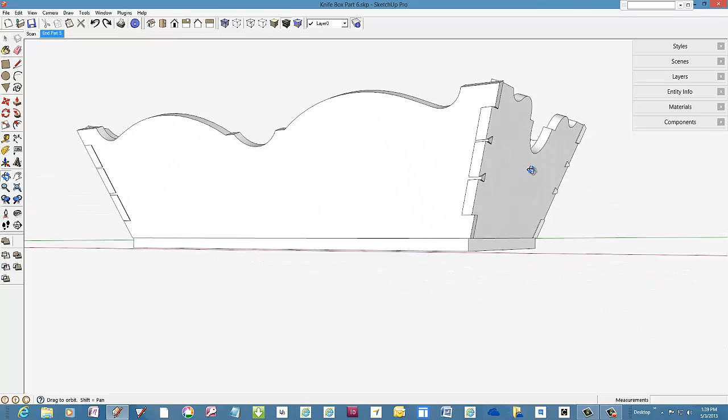We're getting close to the end of the series. One more to do after this one, covering the base molding. In this penultimate part, we will add the handle to the existing assembly of the knife box.

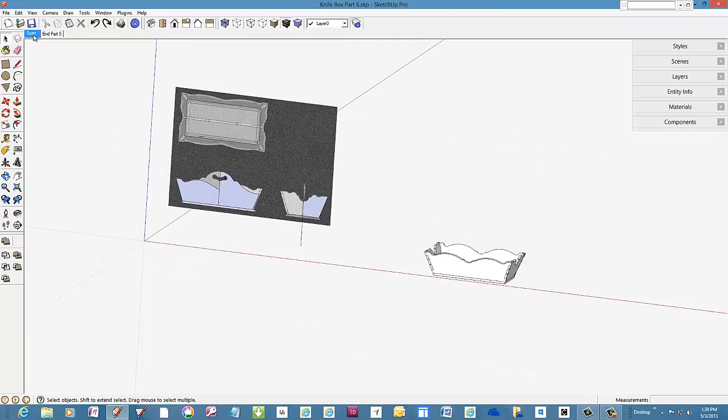The handle is held in place by protruding into stopped dados in the end components. The first step is to get the handle shape as created in part 1 of the series. The shape exists on the scan that we used in that first video. I'll make a copy of the shape and move it over to the knife box assembly.

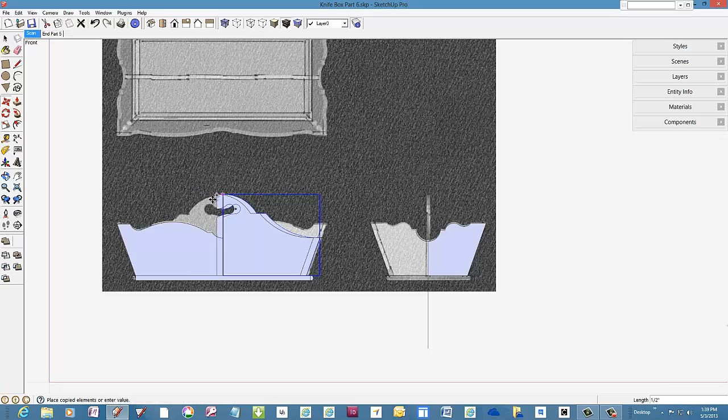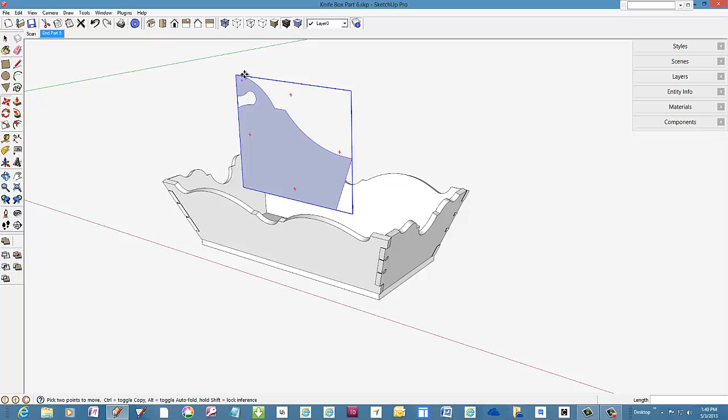The shape is currently a group, so I will explode this group and turn it into a component. Right click on the shape, right click on the shape and pick explode, and then right click again and pick make component. I'll call it handle.

To precisely position this within the box, I will need to move it along each of the red, green, and blue axes. First, the red axis. Click on the center line. Tap the right arrow key to hold the movement along the red axis. Then touch the cursor along the edge of the bottom until the midpoint appears. You should see a cyan color at that point.

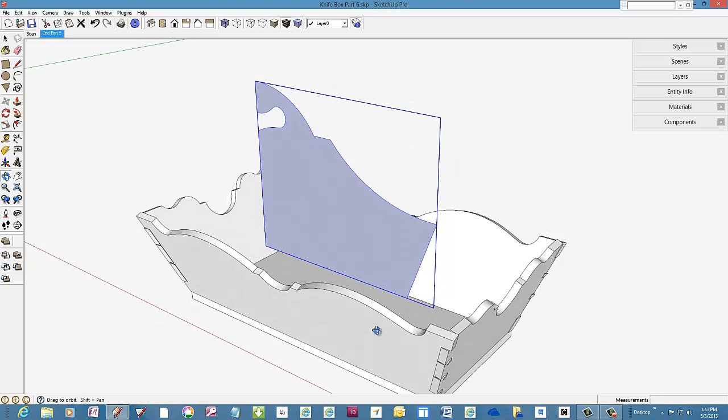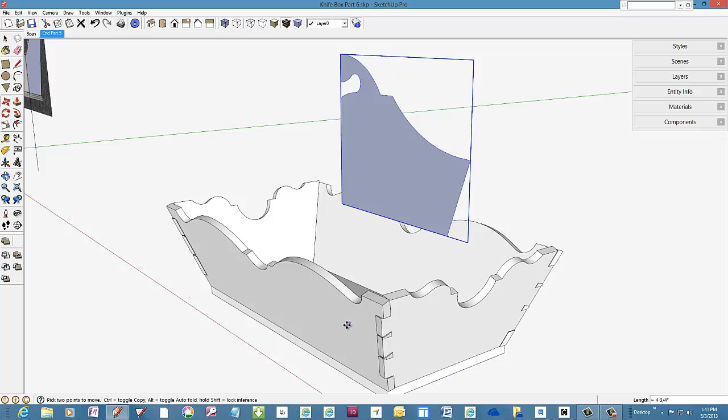Now let's move it along the green axis. Tap the left arrow key to force the movement, and again find the midpoint of the base edge. Then click. One more move, and that's on the blue axis. Force it with an up arrow, and then touch the cursor on the face of the bottom. The handle will be flush with the top face of the bottom.

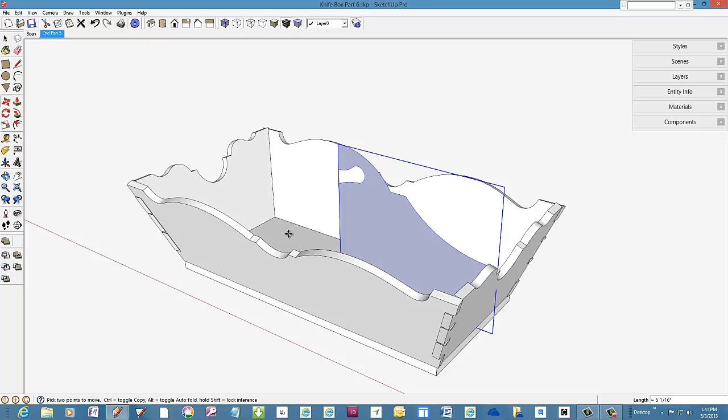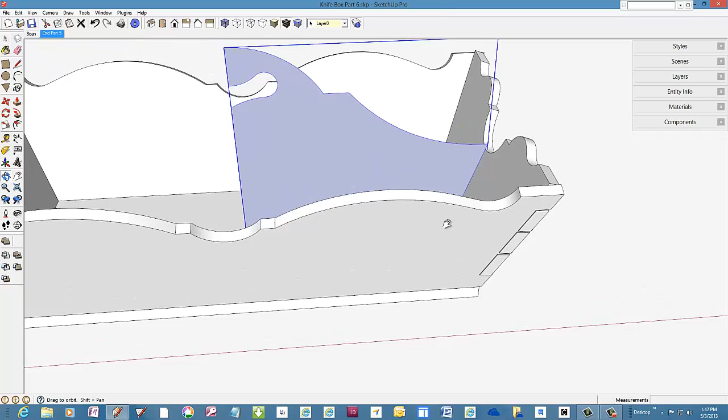We can do a little inspection to see that the positioning is accurate. Also, I've provided some extra height of the handles. You can see it protruding above the shape of the end piece there. That gives me some extra room to use to do some final shaping in the shop and fitting.

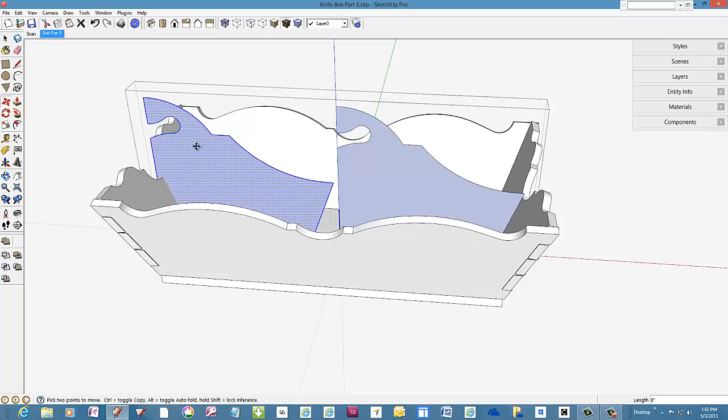This is only half the shape, so we need to copy that shape, edit the component, double click to get the shape, copy that shape, and move it down the red axis. Then do a flip along the red axis. And then zoom in close to make sure you pick the very end of the shape and move it into the center line for connection.

There'll be a joint that shows here, a line through the middle center line there. I'll delete it with the eraser tool.

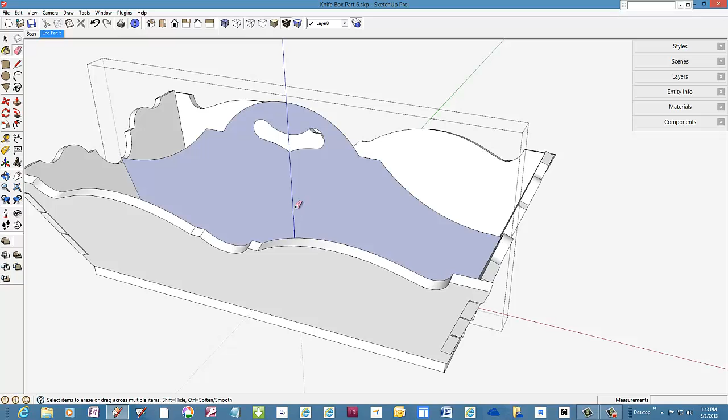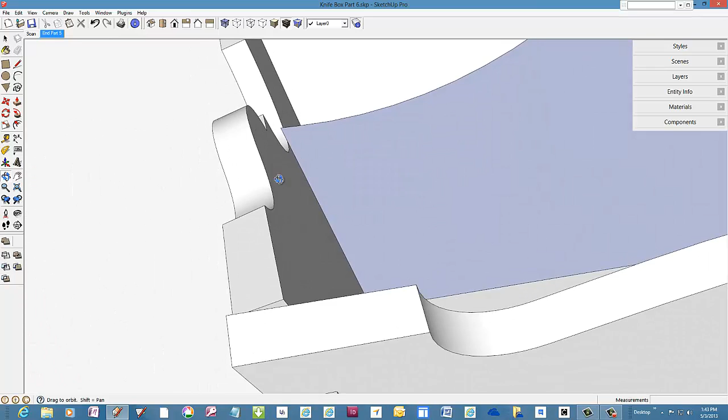Now is a good time also to just check to make sure that we've got this thing positioned correctly and it's the proper length, so we can zoom in and check this end over here to make sure it also fits properly against the end piece. And you can see that protrusion again to give me some extra play in the shop for shaping that end piece.

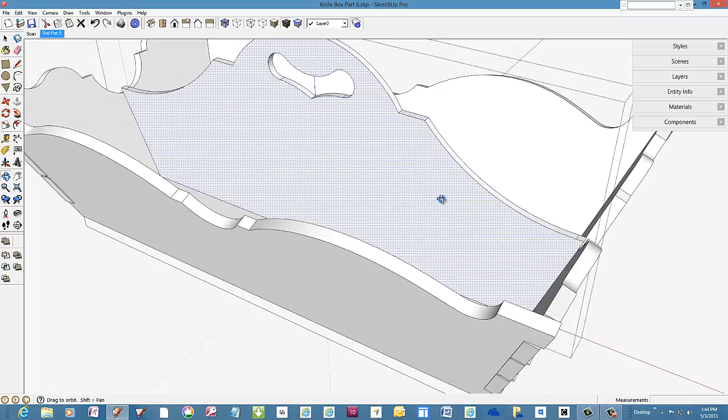To give the shape a thickness of 3/8 inch, we can push-pull 3/16 on each face.

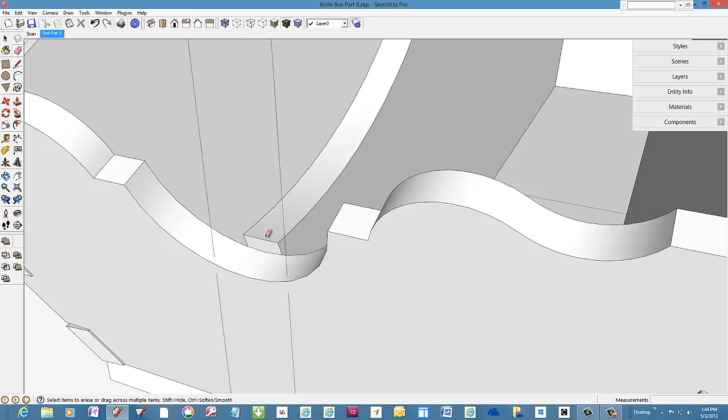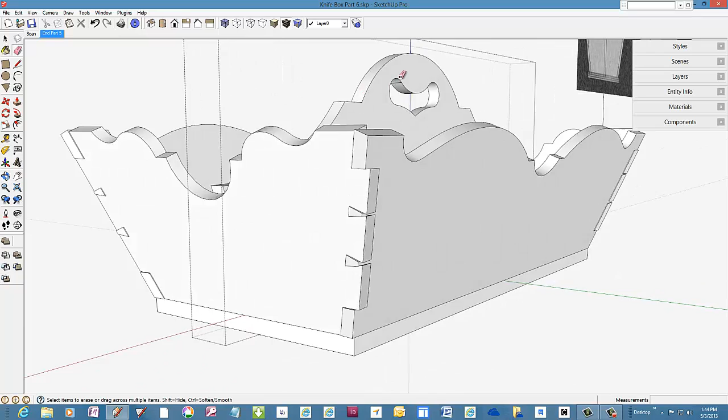Now I can see some extra edges that need softening. Use the eraser along with the Control key or the Option key on the Mac. Click on these extra edges. There are a few of them here. I can see a couple more inside this little recess opening, finger opening, and then there's another line over here. I suspect, yeah, there's an extra line up in the top of that cutout.

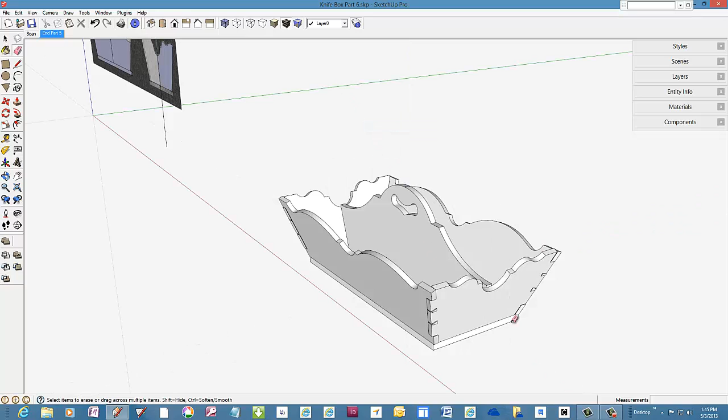Okay, so the next stage is to extend the length of the handle on each end 1/8 inch that sets into the dados that will be put into the end pieces.

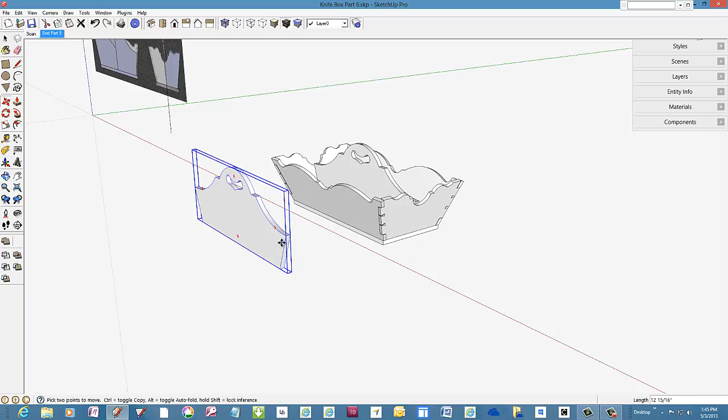To do that, I'm going to bring a copy out in front of the handle. And edit the component. And I'm going to use the tape measure to put a guideline down 1/2 inch from the top edge here.

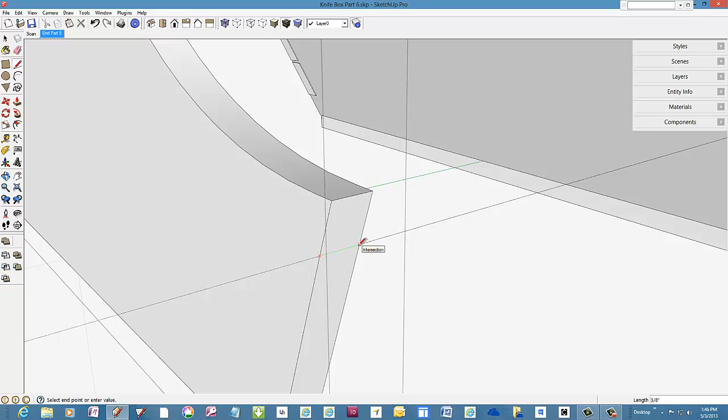This is going to be a notch in the protrusion. So watch for the blue color on that cursor to make sure that that guideline stays on the face, on that angled face. And then draw a line across that edge there. Delete the guideline.

And we need to create this 1/8 inch protrusion. I'll draw a little 1/8 inch line there on the red axis. I can come up and I can see a magenta color, which means I'm parallel, and I could do that line there, but that won't actually work as well.

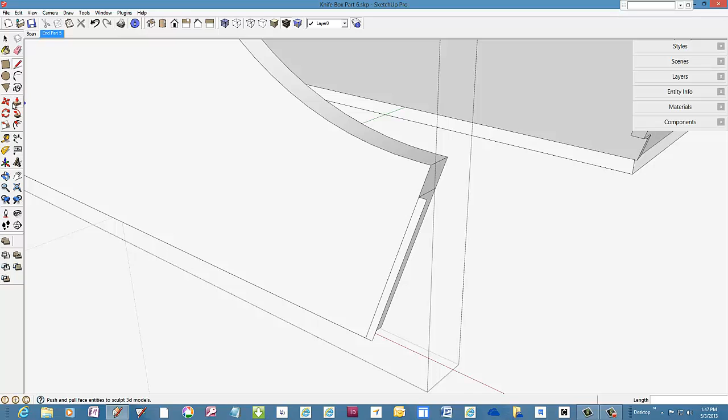I'm better off just pulling a little line out here on the red axis, 1/8 of an inch, and then coming down parallel end point to end point, creating that little face, and using the push-pull tool then to complete the protrusion.

We've got an extra edge here, a line that needs to be deleted, and one over here on this face, on the back face. And we've got a protrusion that'll go into a stop dado.

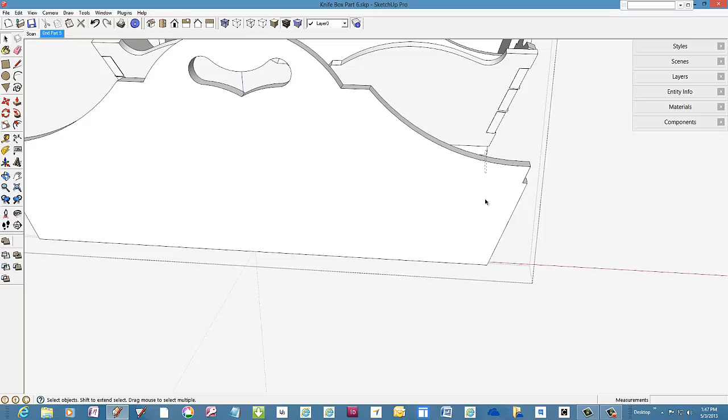I'll copy this shape to the other end. I want to select the full end there. I'm going to do that again to make sure I got it all. And pick the Move Copy tool and bring a copy of that shape over on the red axis. Flip on the red axis.

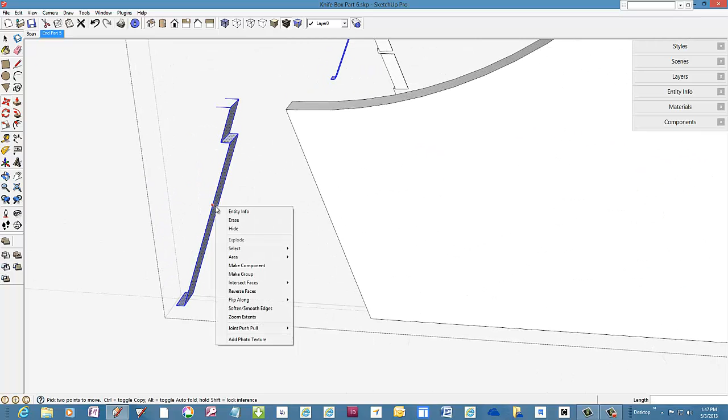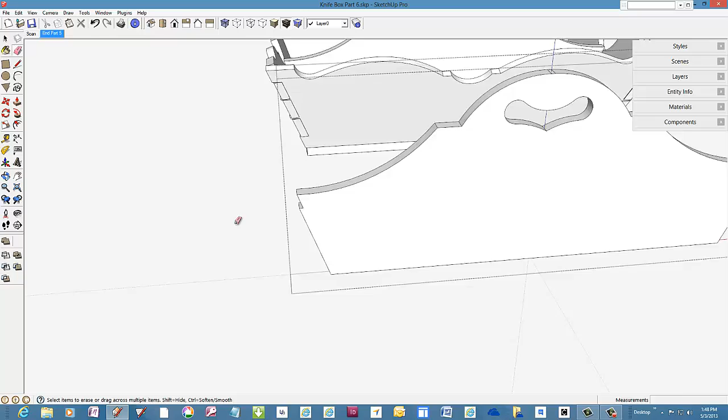And connect in here. There'll be a couple faces missing that we can just finish up with a little edge, tracing over and then getting rid of the extra line again on the back as well. There's a face missing. Just trace over that edge, then delete the extra line.

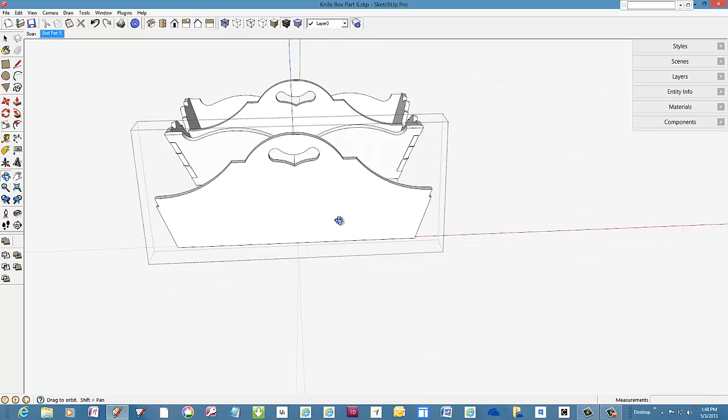So we're done with this copy now, and we can close and erase. Come back to the assembly, and we need to make that dado in the end component.

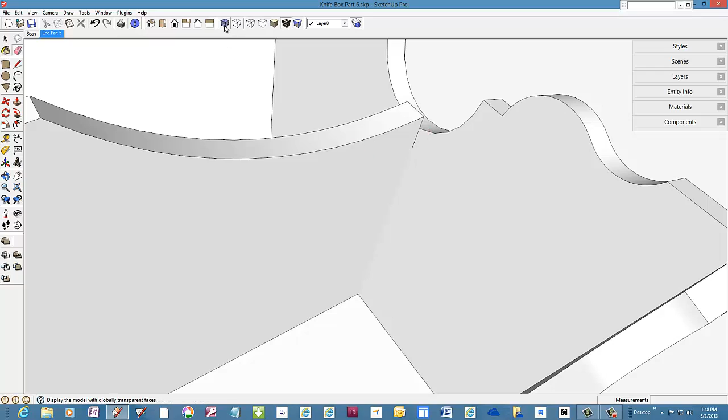I'm going to turn on X-ray so we can see the protrusion, and then just use the line tool to trace over that protrusion. First edit the component, edit the end component, and draw in the shape of that protrusion.

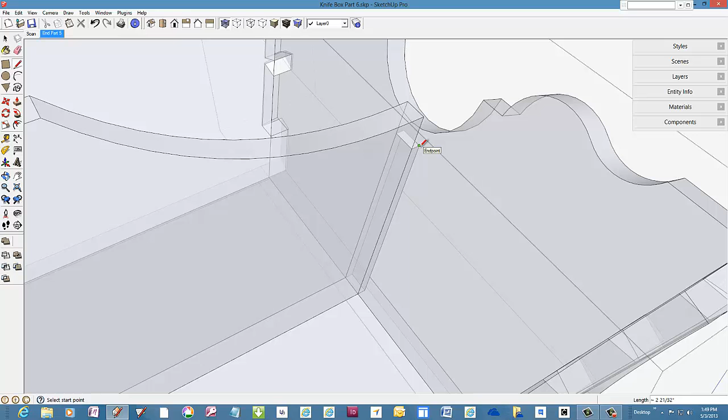And trace over all these little edges here and down the back of the bottom of the dado, and we can turn off the X-ray to see what we've got.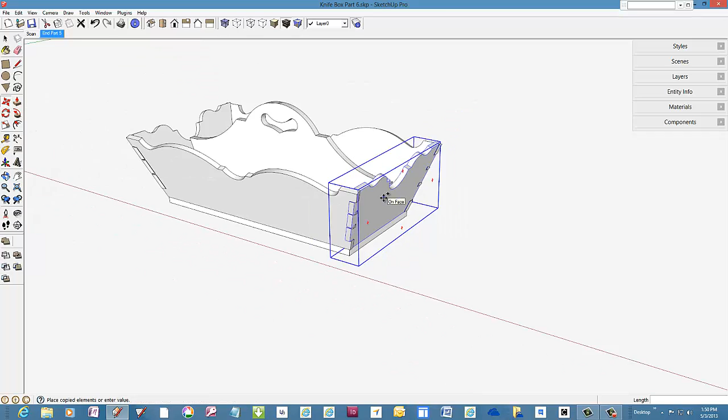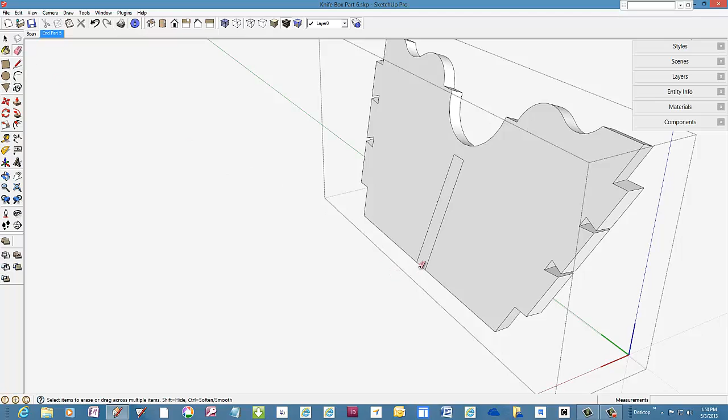The best thing to do is, again, make a copy of the end component this time and bring it out into the clear. Have a look at what we've done with these extra lines. Edit the component. Pick the eraser tool and just knock out that bottom edge, and we should have a dado.

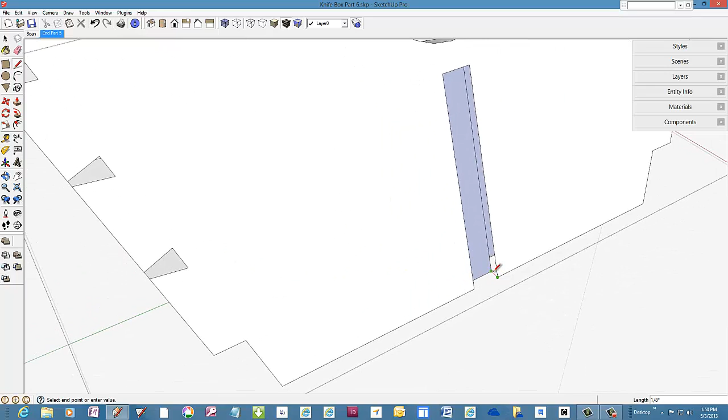Oops, I see I missed an edge down here. Close that in. Probably the same thing over on the other side of the dado. I missed that edge as well. Close that in, and then reverse faces here. And we've got a stop dado.

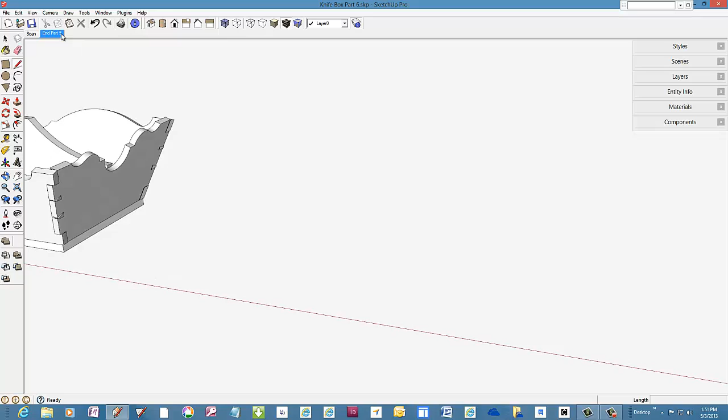I'm done with the end component. I can erase it. And the handle is in place, locked into there with that stop dado.

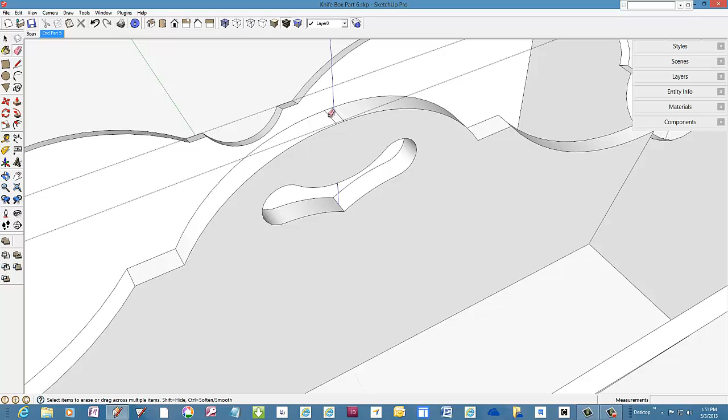And looks good. Oh, I see some extra edges that need smoothing with the eraser tool and the control key. And that completes making the handle. Next time we'll do the molding on the base.